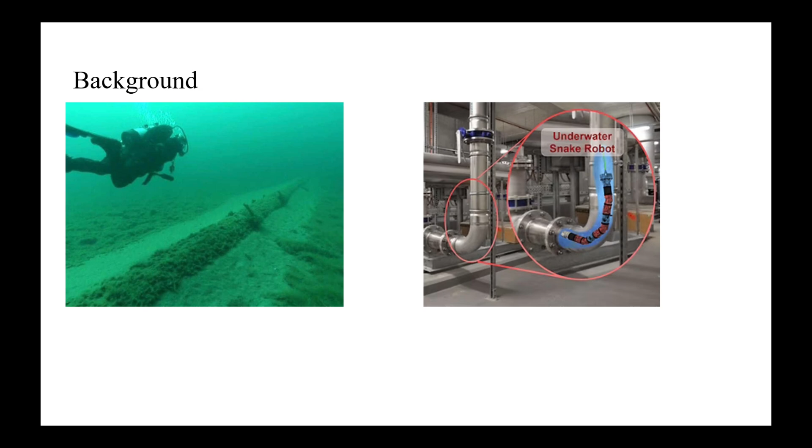For HUMRS, station keeping is difficult because of the unknown hydrodynamics and external disturbances, as well as the HUMRS' under-actuated design. The objective of this research is to design a controller to maintain the HUMRS' head at a desired position and axis while rejecting non-linear disturbances.

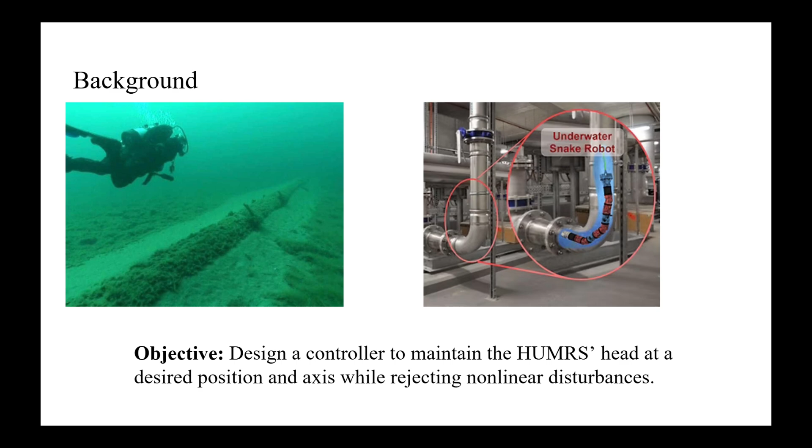The controller minimizes two errors: the position error of the head, E, and the tilt error, theta tilt, between the desired axis and the head's longitudinal axis. Rather than using the full Lie algebraic error, the controller intentionally disregards rotation about the robot's longitudinal axis. This is because HUMRS is underactuated in roll and cannot directly control that degree of freedom.

By controlling the head position and pointing direction instead, the controller focuses only on the components of the pose that the HUMRS can meaningfully regulate. The control system consists of two main components. First, the propellers use PD control along with feed-forward compensation for gravity and buoyancy. Second, the joints also use PD control with compensation for gravity and buoyancy.

To evaluate the station-keeping controller, the HUMRS was subjected to four types of external disturbances: a sinusoidal disturbance, a multi-sine disturbance, a Gaussian disturbance, and a step disturbance. The baseline PD controller does not explicitly estimate these disturbances. Therefore, it cannot truly compensate for them, leading to position error and inability to maintain its station-keeping objective.

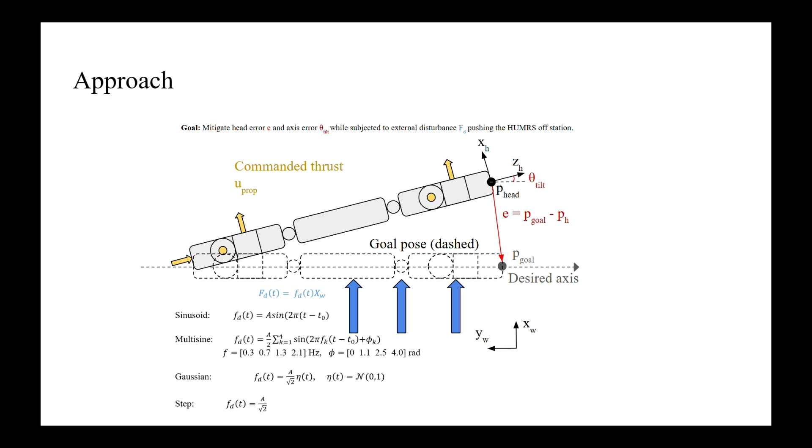To improve performance, I implemented a disturbance observer, shifting towards disturbance-observer-based control. The disturbance observer compares the motion of the HUMRS with the motion predicted by a nominal dynamics model. Using the measured velocity and an acceleration estimate obtained through finite differencing, the recursive Newton-Euler algorithm, an inverse dynamics algorithm, calculates the generalized force required to produce the observed motion. This is tau d hat, which is a measurement of the external disturbance tau d.

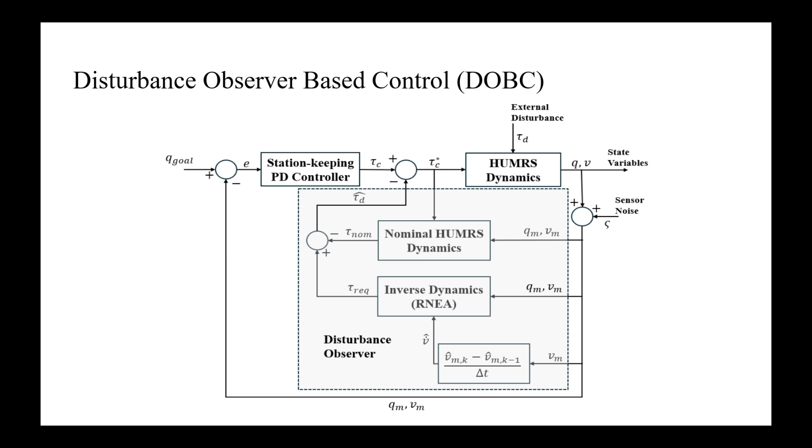We can now examine how the disturbance observer affects station-keeping performance. First, we will start off with the step disturbance. Under step disturbance, PD controllers are unable to eliminate the steady state error and the robot drifts far from the desired position. However, once the disturbance observer compensation is introduced, the error decreases substantially.

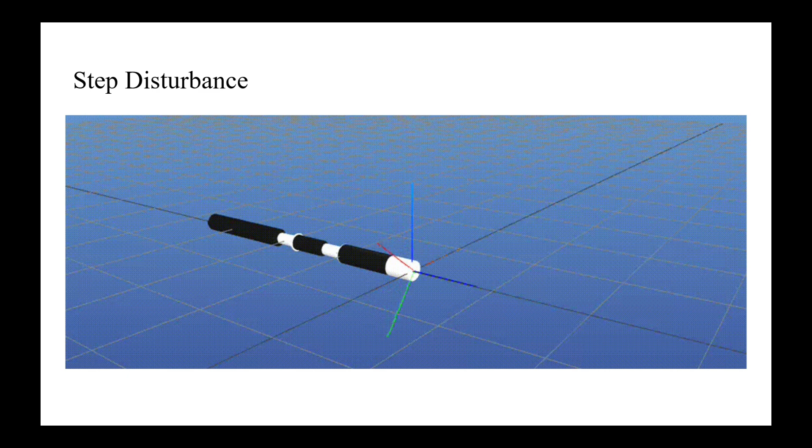Observing Gaussian disturbance, a similar pattern occurs. With only PD control, the robot experiences large and irregular position errors that it is unable to correct. Once the disturbance observer is implemented, station keeping is greatly improved, although the remaining error is larger than for some other disturbance profiles, as can be seen.

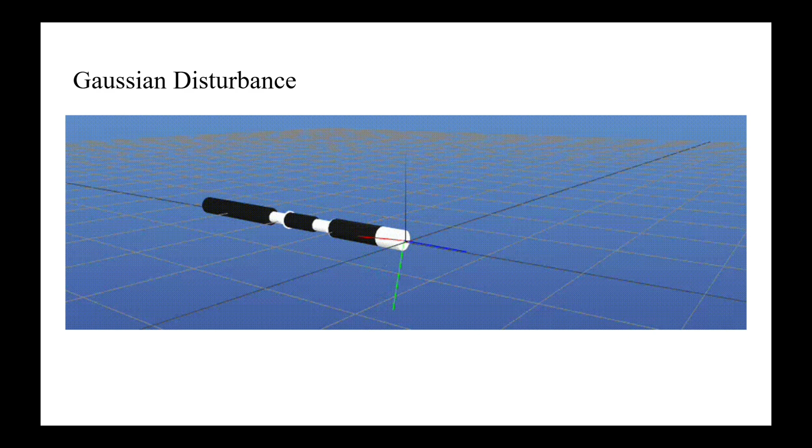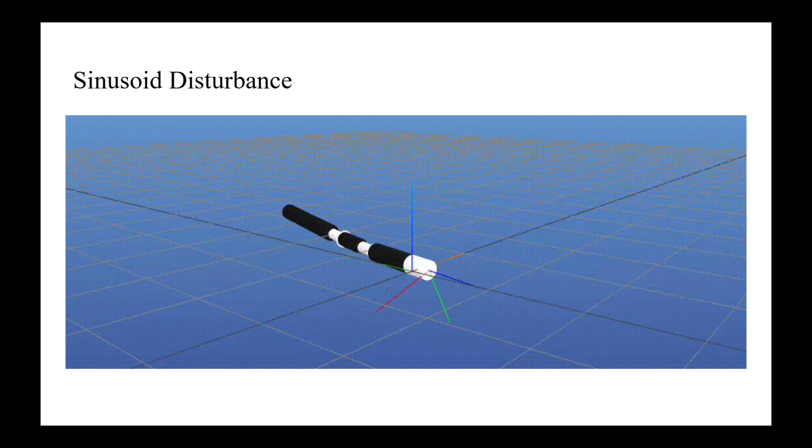Regarding the sinusoidal disturbance, the uncompensated robot repeatedly moves away from the desired position and oscillates. When the disturbance observer is implemented, the position error is significantly reduced, but these oscillations can still be observed.

Finally, we examine the multi-sine disturbance. The PD control, again, deviates considerably from the desired pose. But after the disturbance observer compensation is introduced, the robot remains much closer to its commanded position.

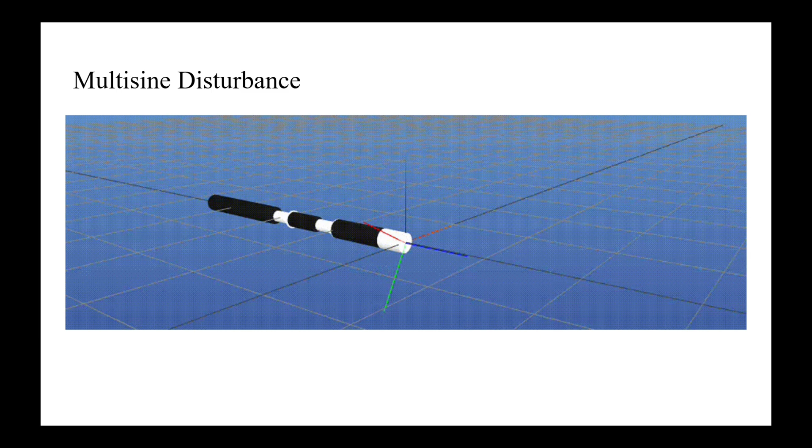Next, we will look at the results. For a quantitative evaluation, each disturbance type was tested at 20 disturbance levels ranging from 10 to 200 newtons in 10 newton increments. The sinusoidal disturbance was used as the reference. For each sinusoidal peak amplitude, its root mean square force was calculated. The step, Gaussian, and multi-sine disturbances were then scaled to match that RMS force, allowing their effects to be compared more fairly.

With the disturbance observer enabled, the RMS position error decreased dramatically for all 4 disturbance types. The Gaussian disturbance produced the largest remaining error, while the multi-sine disturbance unexpectedly resulted in slightly lower error than the single frequency sinusoidal disturbance.

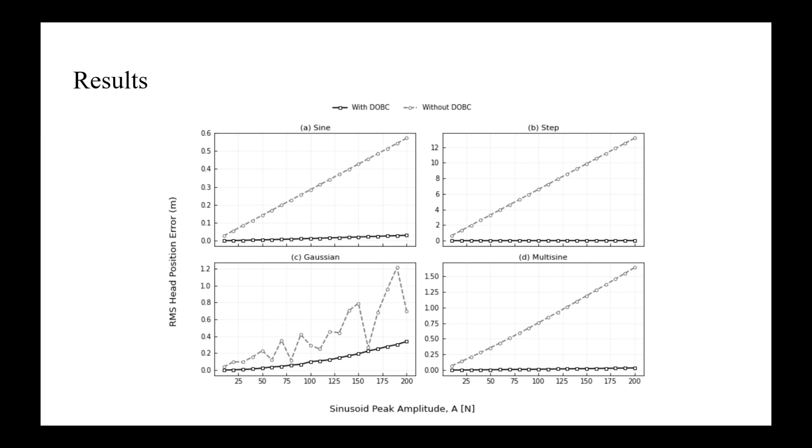These results are limited by several key assumptions. First, the simulation uses noise-free estimates and assumes that the nominal model accurately represents the robot, even though the complete system identification of the HUMRS has not yet been performed. This evaluation also assumes ideal and unconstrained thrusters without command deadband, actuator dynamics, or maximum thrust limits. These assumptions isolate the performance of the control architecture, but they do not fully represent the robot.

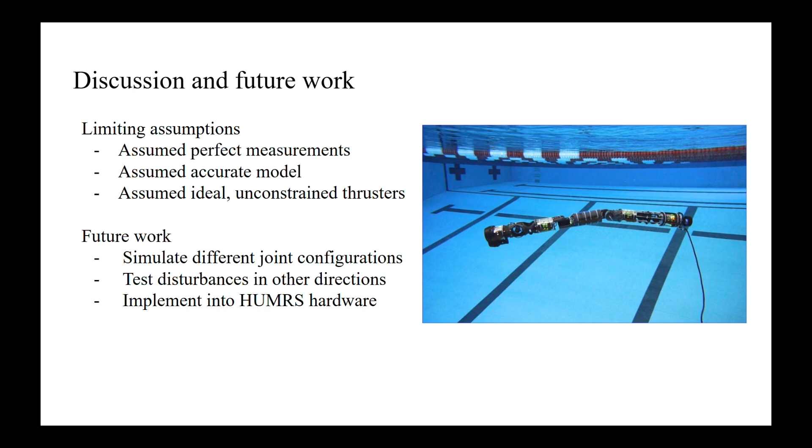Therefore, the results shown here demonstrate that disturbance observer compensation can substantially improve HUMRS station keeping under time-varying external disturbances in simulation. However, they should not yet be interpreted as the disturbance rejection limits of the current hardware on the HUMRS. Thus, future work should evaluate additional joint configurations, robot orientations, measurement noise, model uncertainty, and realistic actuator constraints. Most importantly, the controller and disturbance observer should be implemented on the HUMRS hardware for experimental validation.